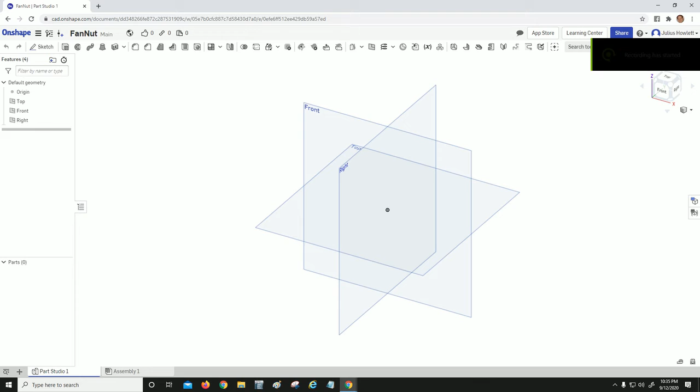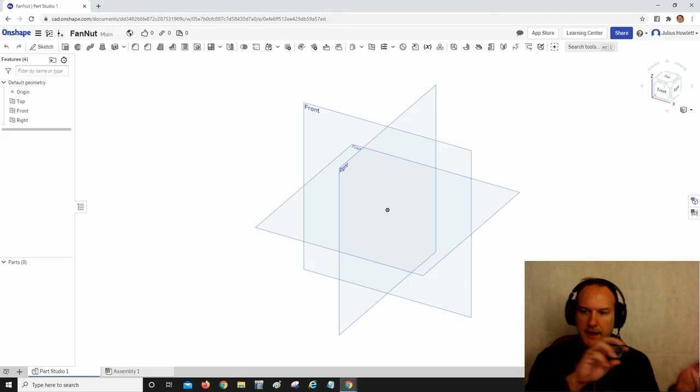Let's go ahead and get started. I'm here on Onshape, a free CAD programming tool you can sign up for. I've already taken all the dimensions of this fun little piece, so let's get started.

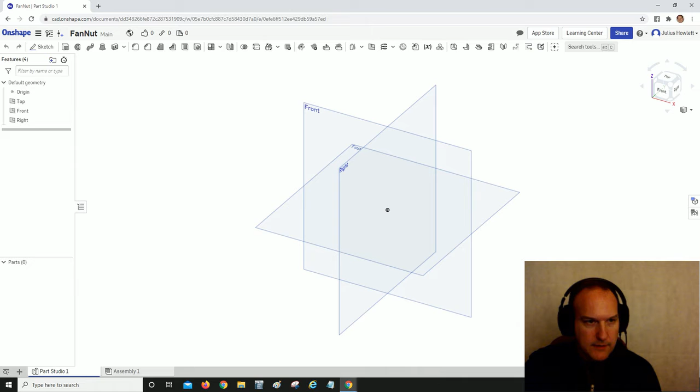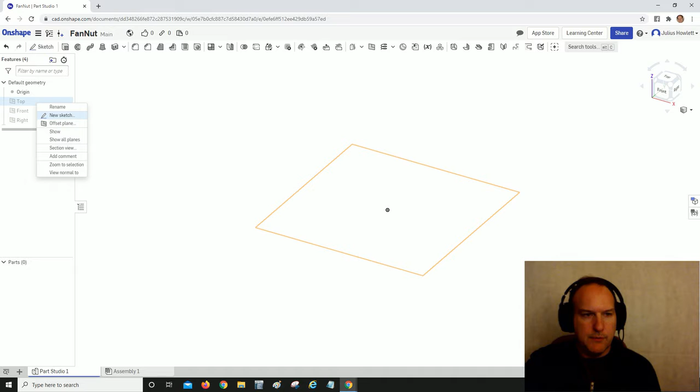Whenever I start off, this is a new fresh document. I turn off all the planes showing up by default, and usually design things such that as it prints, I try to start with the print surface, the surface that would go on the build plate first. And I always try to design things so you don't have to print them with support.

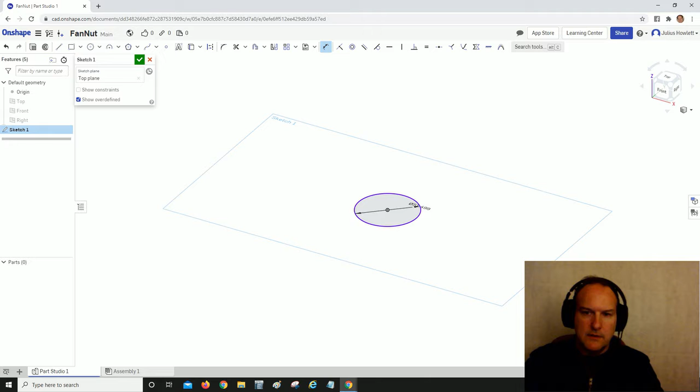So let's look at the first dimension of this. It's the top end here, that's the outside diameter. I'll create a circle starting at the origin, bring it out. We'll constrain it to that dimension by hitting D for dimension, click in here, and the OD is 38.8 millimeters. You can set your dimensions from inches to millimeters. I always work in millimeters, it's so much easier.

Then the height of this thing is about 9 millimeters. I'm not going to spin it around, I just want to, there's just an ever so slight chamfer here.

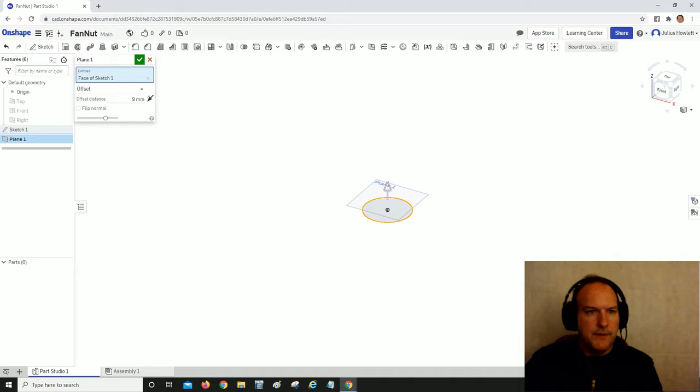So I'm going to create another plane from this one. I'll hit OK on that sketch, then offset this plane by 9 millimeters and do another sketch from there. So there it is, defaults to going north of the top plane.

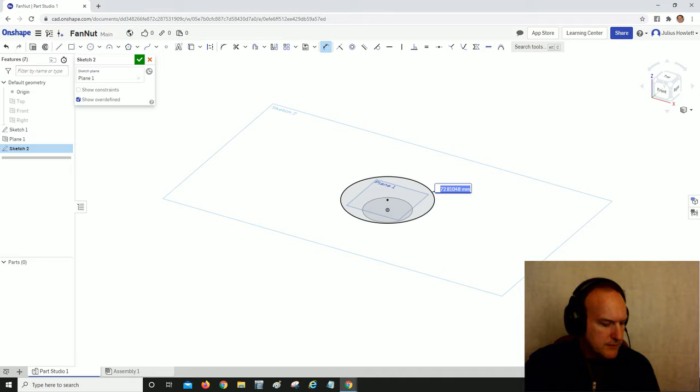On this plane I'll create a new sketch, and this time I'm still going to use the origin as my center point and make it a little exaggeratedly large. I'll hit D for dimension, and this one is going to be... 39.2, 39.2.

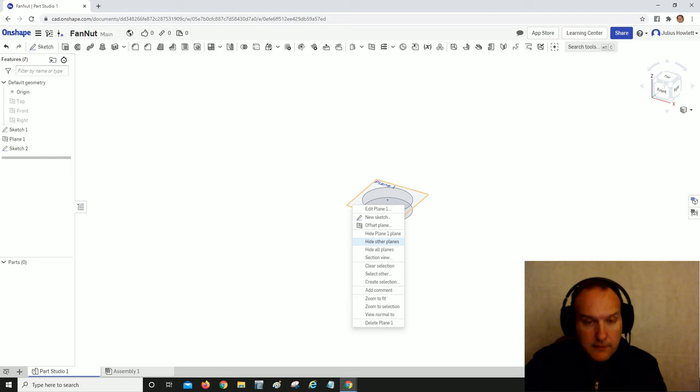Alright, now that we've got those two good to go, I'm also going to put in these little grips on the side here. There's 8 of them, and we're going to install each and every one of them and do what's called a loft.

So I'm going to hide all these planes because they always look so ugly. And then let's just go ahead and do a loft right now and get a solid piece started. We'll hollow out the bottom later on.

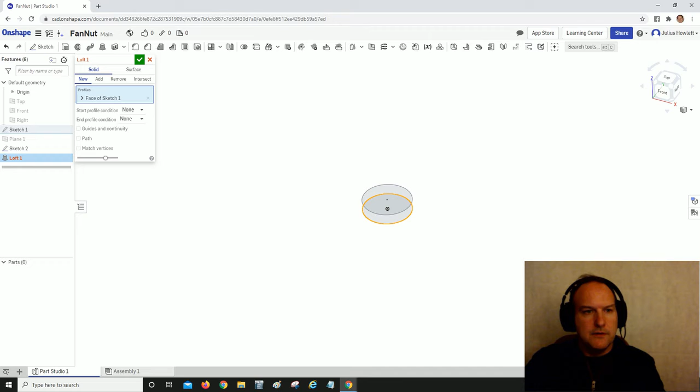So we'll go up here to loft, and I will create a new part starting. There's no start profile conditions nor that one. I'm just going to select these two pieces, and voila, it makes a cute little loft, a solid piece with varying dimensions.

Now what I'm going to do is go ahead and work on those outside pieces. We'll start with this one, and I'll just loft it down. We'll start from the base of it, which is actually going to be printed last. Let's see, the outside OD of those was 42.5.

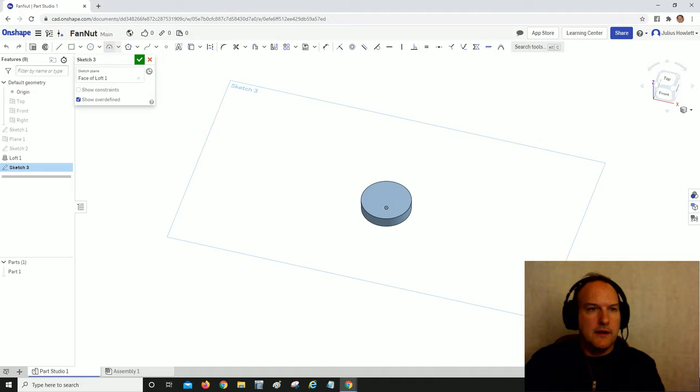So we've got this guy going. We'll do a semicircle, go ahead and orient it so we can see it normal to the plane. We'll do an arc, and go from here to here, making it a perfect semicircle by using a construction line from here to here. We're going to make this the center point buddies with that construction line.

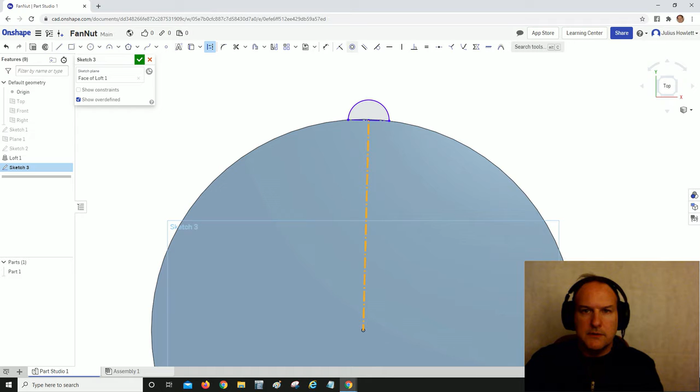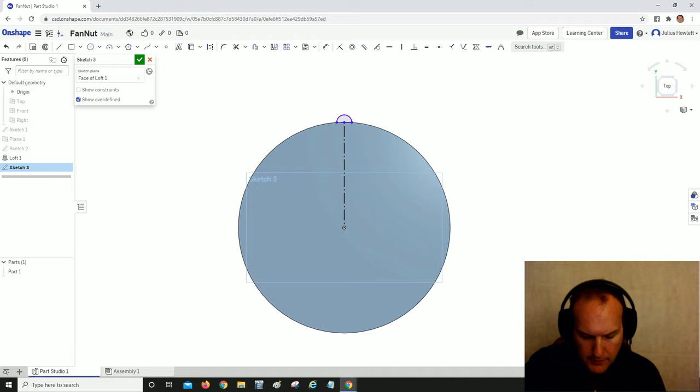I also want to create another construction line which we're going to make vertically perpendicular to the origin. To do that, you go up to your constraints and tell it you want it to be vertical—you could also hit the V button. This is going to be a semicircle, and if we do our math right, from here to here should be 39.2.

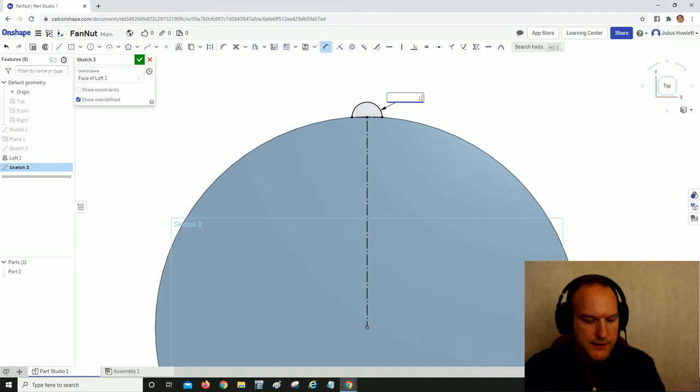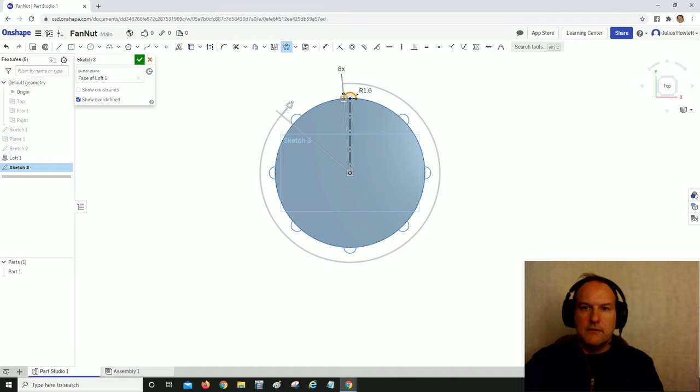So what we're going to do is a circular pattern using that, and it's going to go all the way around. It's not going to be 3x, the default is 3, we're going to change that to 8. And voila, now you've got 8 of them, and you didn't even have to lift a finger.

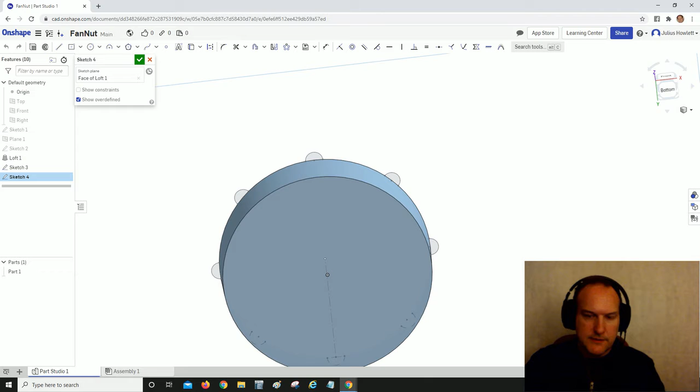So now we've got our little detents on the top. Let's go ahead and do our little detents at the bottom. We'll create a new sketch down here as well. We could use these as references, but instead we're going to just do the exact same design on the bottom. This time I'll make a construction line from the origin to the very bottom, and it looks like it's snapped to a vertical position.

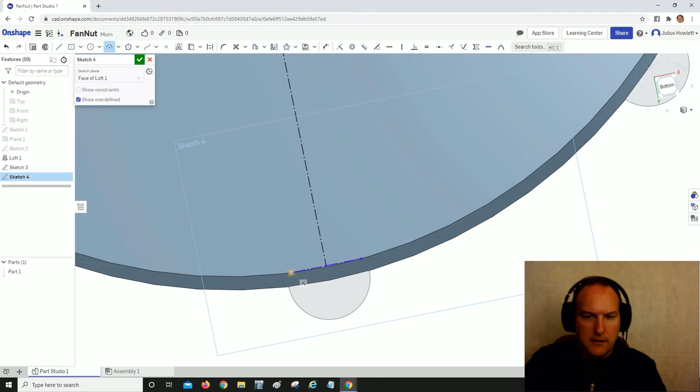Then I'm going to create my favorite little construction line that goes from here to there, and of course it's going to be a midpoint buddy with this thing, so I've got to remove the connection from there to there, have it connect instead to here at the midpoint. And I'm going to create another arc in much the same way as I did the last one, and this time the arc should be 1.4, the new one, so it's going to be 0.2 less than the previous one.

The other one's 1.6, now it's going to be 1.4. So we'll go ahead and set up that dimension to be 1.4. Is that right? Let's see. 1.4. That sounds right, close enough. If it isn't, we'll live.

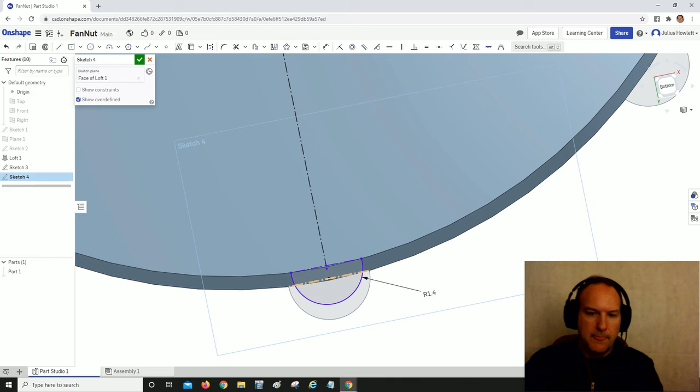Again, it's going to be midpoint buddies with this thing. I'm going to make it coincident by typing the I button. Notice how everything turns black once I constrain it. I hate it when things turn blue, that means something can change and get all wonky on me. But by making it black, it means nothing's going to change on me if I add other things to it. You'll probably see why as it develops along.

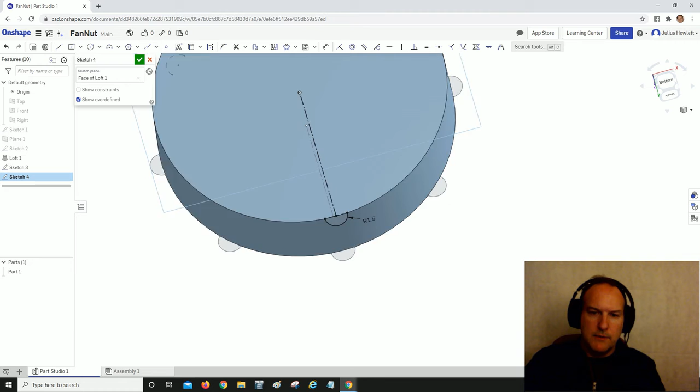I'm going to change it to 1.5 just because it looks a little closer to what I want. Alright, once again we note what's coming up here: we're going to put in a circular pattern. We want 8 of them. Go ahead and pick this guy, change that default of 3 to 8, and it looks like everything's beautiful. I'm going to hit OK.

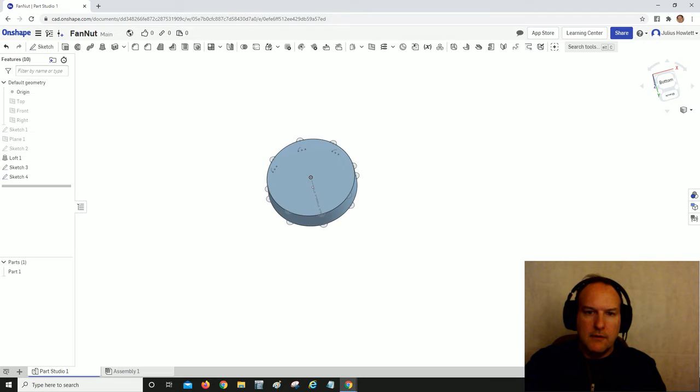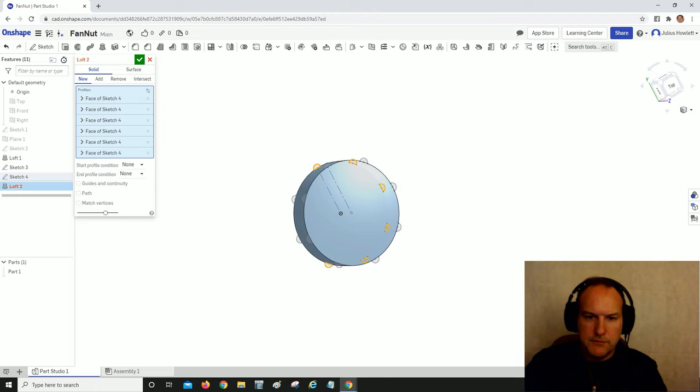And once again we can loft everything from top to bottom, so let's go ahead and do that real quick. Loft: we'll choose this guy, this guy, this guy, this guy, this guy, using my roller to basically zoom in and out. There we are. And then I want all those guys to connect with this guy, this guy, this guy, this guy, this guy, this guy, that guy, and that guy.

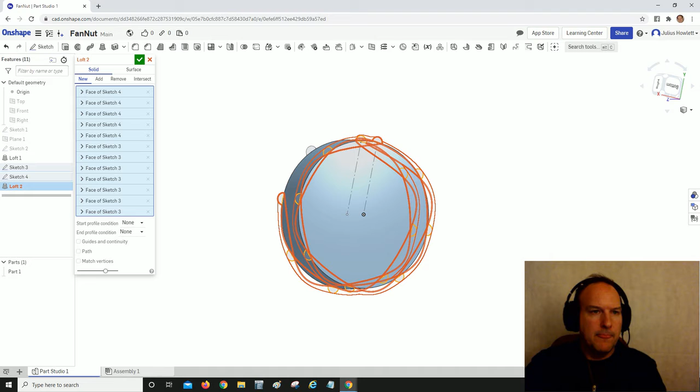What a mess, huh? So what I want to do is add, and we're going to go ahead and get rid of all those again. Obviously, I messed something up.

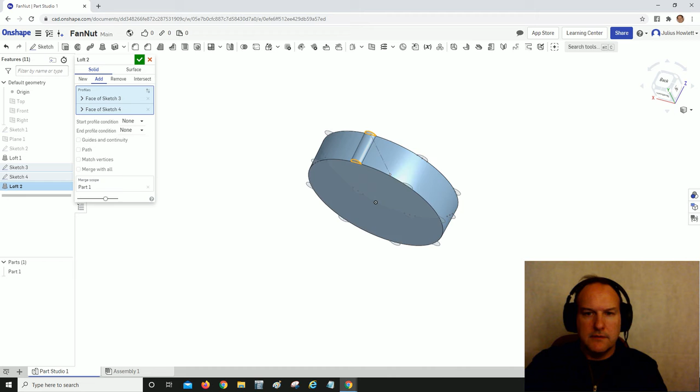Let's just do it one at a time, shall we? We'll do it that way, that way, and it looks like it was perfectly happy doing that. It'd be really nice if I could do that again like this and this, but unfortunately it's just going to assume that I keep trying to S-curve it along.

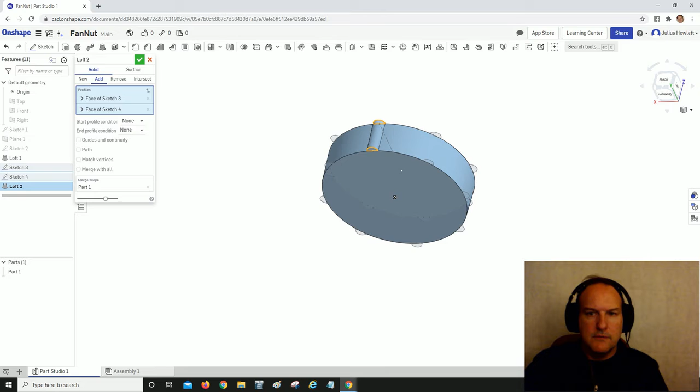So let's go ahead and get rid of those guys, and we'll just do it one by one. We'll hit OK, and we'll do another loft. I do this for all 8. Notice how the sketches all disappeared after I hit OK on that, so I'm going to have to make them both appear again. Once I ask them specifically to appear again, they basically won't be forgotten again.

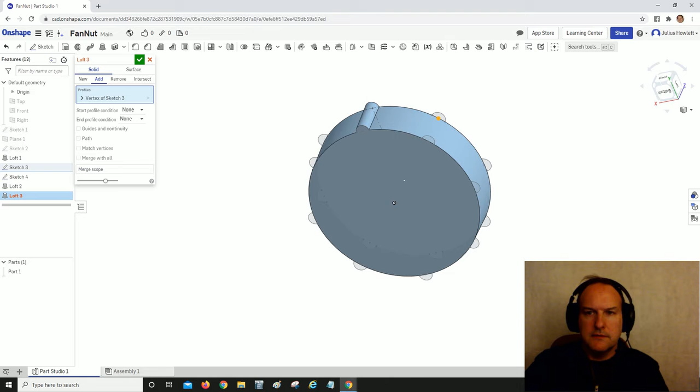Oops, nope, don't want that little fella, we want the actual surface. And there we go, it's beautiful. We'll do it for all 8. I may have to skip ahead so people won't have to watch me do this again and again painstakingly for each and every single one of these.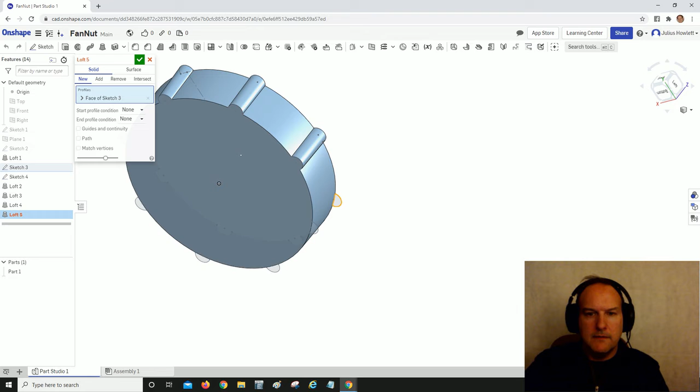Or, you know, I might just keep it in there. Why not? That looks good. We'll just make another one. You and you, looking beautiful. And it looks like it actually knows that we need to add it instead of creating a new part. That one, that one. And we'll do another loft.

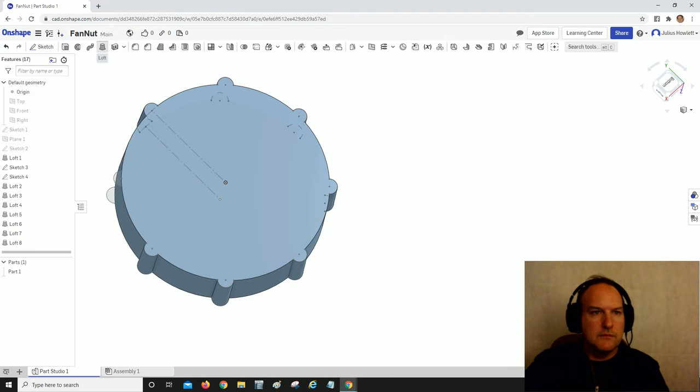Beautiful. Look how this is just coming together. That one, that one, and of course we will also do this one and this one. And that looks like it's getting close to my little part.

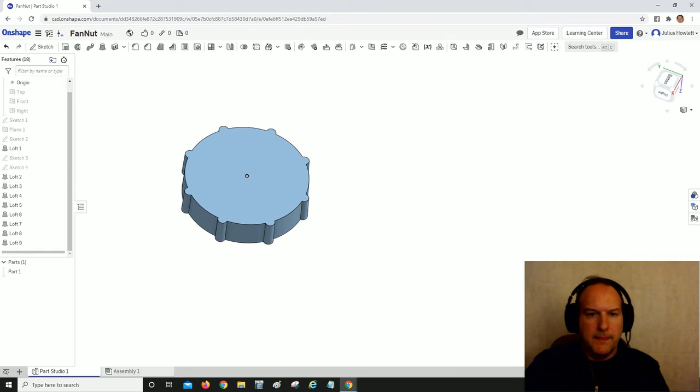Next, we want to make some of these sketches disappear because we no longer need to refer to them. So I'll just go ahead and hit it over here in the features history, and we'll go ahead and look at it from the top again. There's the top. And now I want to hollow this thing out.

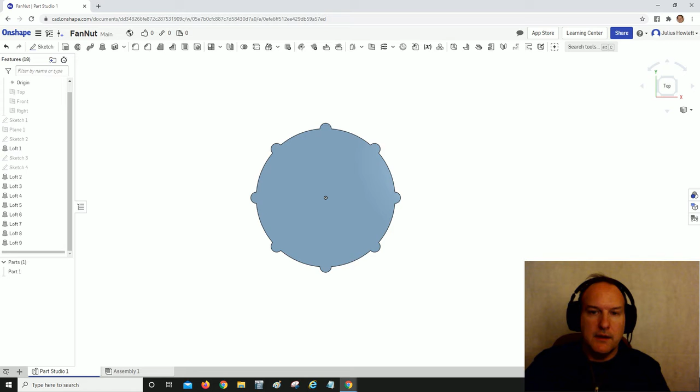The inside diameter was, according to my notes here, 24.4. Take that back, it's 28.2 on the most open-ended side. So we'll go ahead and create a new sketch here.

We'll make a circle by hitting the C button. And this time it is going to be... what did I say? 28.2.

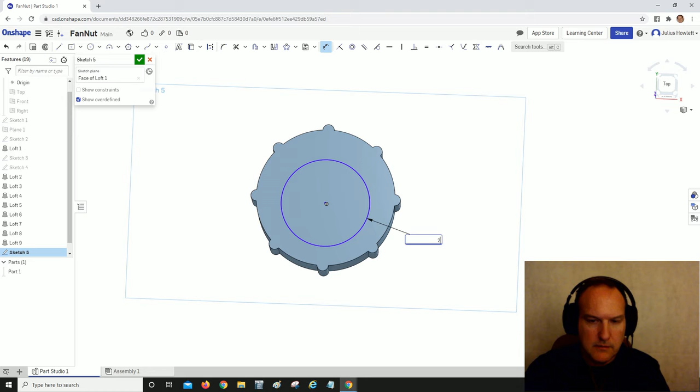Sometimes people put these constraints inside the history, but this is one of those one-off fun projects that's just going to be done once, so I don't really need to be too nitty-gritty. I'm going to make the origin coincident with the center of the circle.

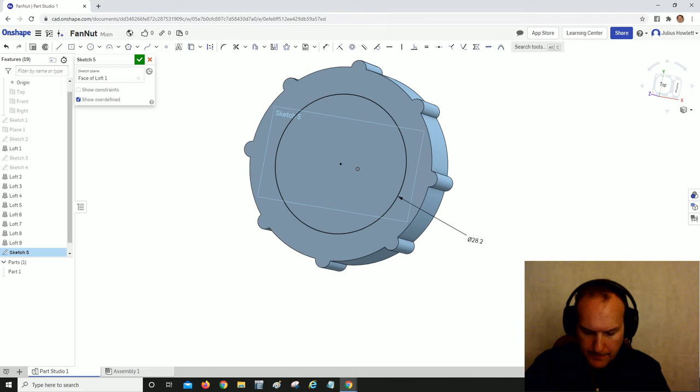Now that we've done all that, that is the widest inside diameter. I know that there's also a little lip on the inside of this that it goes down to. That lip is about 1 millimeter in height. So in other words, I just need to recess this down about 8 millimeters instead of 9, so we actually get that little lip on the inside.

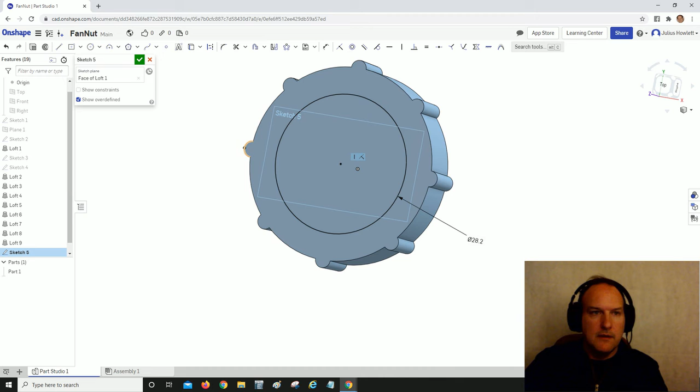So let's do that: 28.2. The other one's going to be 24.4, the other ID that gives us that lip. So how do we do that? Instead of doing add, we're going to extrude and remove, and we're going to only remove a blind depth of 8.

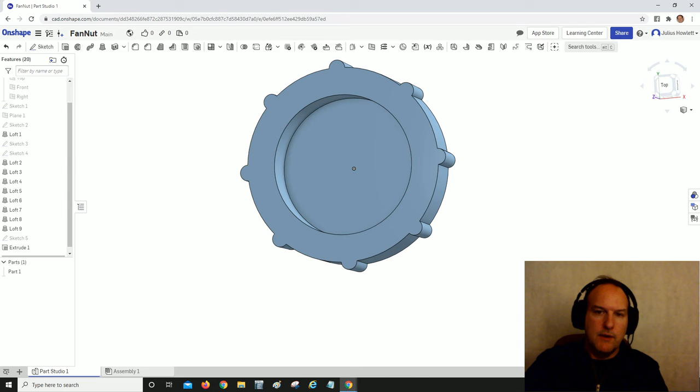There it is, getting closer and closer. Now we're going to go ahead and use the new surface that we just acquired, and we're going to create a new sketch. Draw another circle, exactly like we did the last one, and this time that circle is going to be, according to my notes, 24.4.

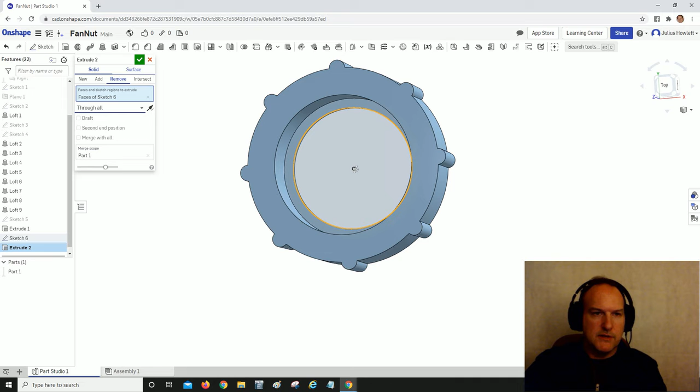Isn't that lovely? We're going to go ahead and extrude this one all the way through. Remove, and you're going to remove not blindly, but just do a through-all. It's just cleaner that way - don't just give blind measurements when you know it just needs to go through everything. And there we have a 1 millimeter lip on the inside of this happy fella.

Now this is the challenging part that people start running for the hills on - it's the little thread on the inside of this guy. And today we're going to learn about the helix.

This little feature up here is the helix, and the way you do it, copying threads, is actually fairly simple. All you have to do is figure out how many rotations there are on the thread, and that's pretty much all you have to do - we already know the rest of the dimensions.

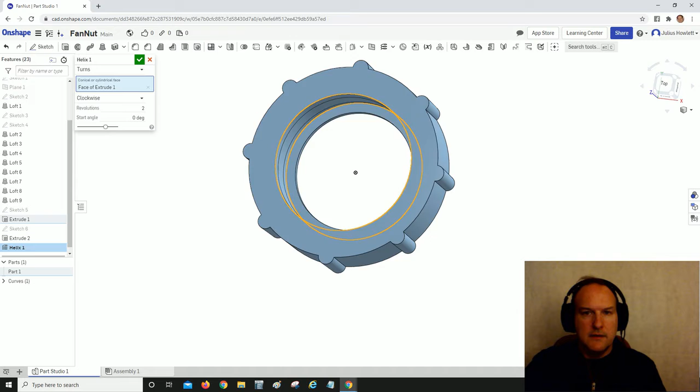All we need to do is, in this case, put in - it looks like 2 revolutions. 2 revolutions, and I believe it's clockwise, on the inside of here. Voila, you can see there are 2 revolutions going through that thing.

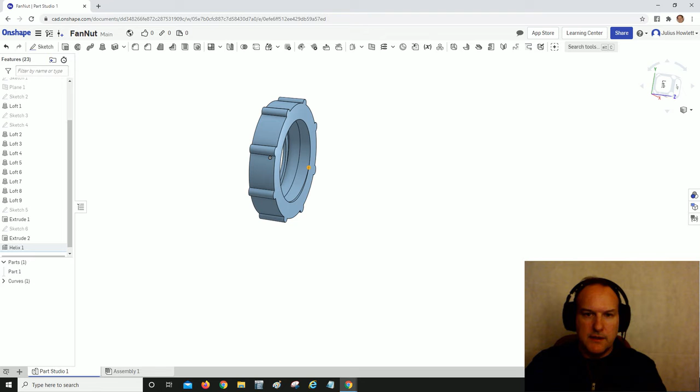Alright, now that we have a helix, we're only going to be using that as a guide path for the profile of the actual thread itself. So now I need to find out where this helix intersects with the outermost circle, and I'm going to use one of these planes here to create a new sketch.

Alright, and I believe that guy pretty much started at that intersection. So I'll use this, and we're going to use the inside of the circle as a guide reference, right there. Alright, and I'm going to make it construction.

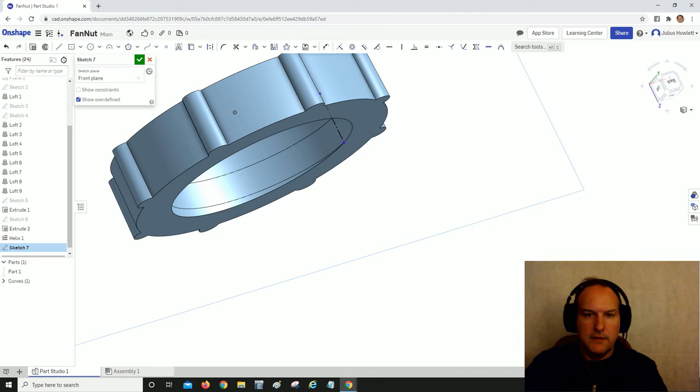And we are going to make a little triangle for our thread, the profile of our thread. That's going to be a real line. I'm going to hit L, and you're just going to make an equilateral triangle against the construction line.

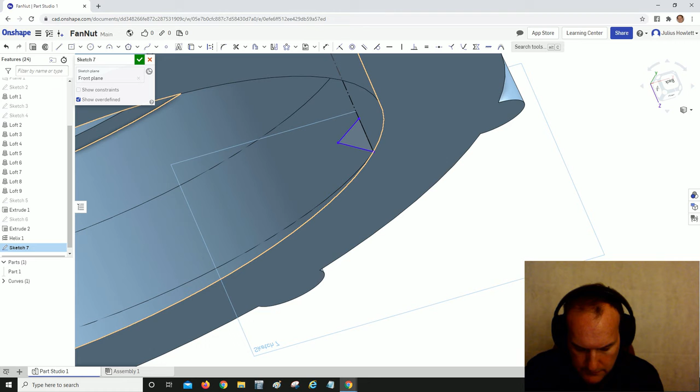Alright, and the triangle height looks like it's about 2 millimeters. Yep, 2 millimeters. So the distance from here to here, we'll make another construction line, and we'll make it midpoint buddies with that edge of the triangle.

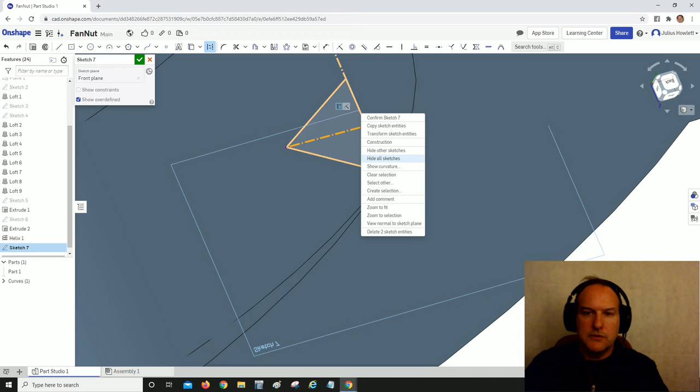That's going to be one equilateral to the other edges. I'm going to make sure I select the correct one by doing select other, and highlight through, scroll through here until I find it. There it is right there.

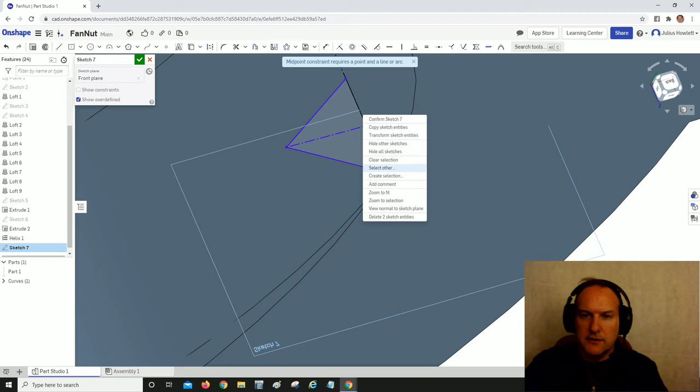And I want those two to be midpoints. You know what, you need to make sure you choose an actual point in the line itself - not 2 lines, can't be midpointish. So I'm going to hit select other just like I did earlier, scroll through until I find it. There it is, and voila.

They are now midpoint buddies. Isn't that great? Okay, so now I also want to make them perpendicular to one another, and I want this height to be 2 millimeters.

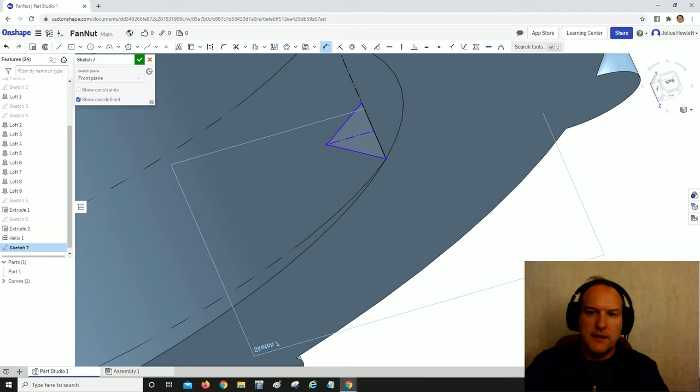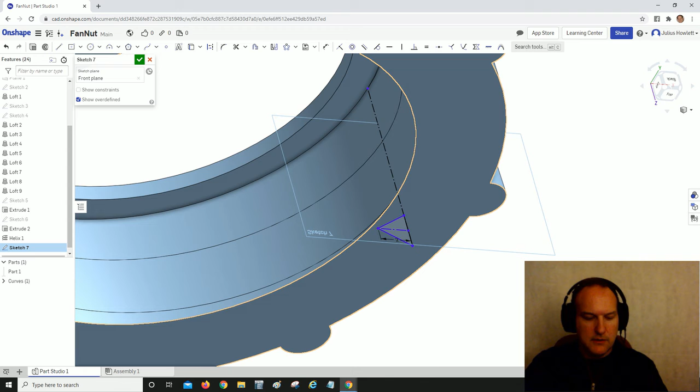Fair enough. And then I want this side and this side to be equal. And again, the bottom one down here doesn't know that it needs to be equal to the rest either, so I'm going to select it again. There it is. And I highlight this one, make it equal as well. And it did not like that. We'll go ahead and Control Z to get back to where we were. And let's find out what constraint is messing up here. Alright, so I can tell that this end right here is loosey-goosey, and I don't like that. I need to basically anchor it to this point where the helix starts. So I'm going to choose this point thing up here, highlight the point that the helix starts.

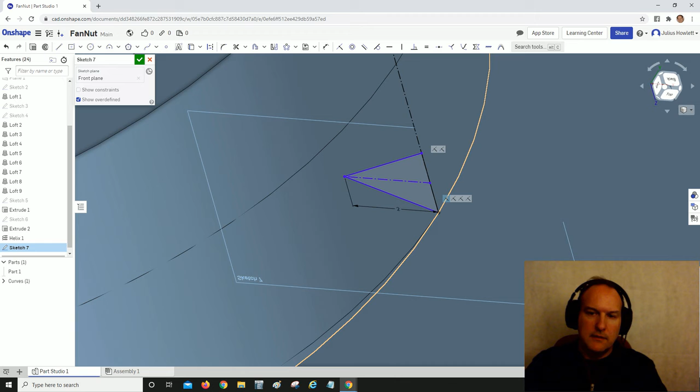And I'm going to make this coincident with the edge of our triangle. And now we're going to go ahead and make this equal to that, which it already is, but I also need to set up a parameter where I lock in the edge down here. So I'm going to go ahead and select other, find our favorite edge, and give it a dimension, that guy right there, and we'll just make it, I was hoping to make it 2, but maybe we should just make it 1.6. There we go, a nice clean 1.6.

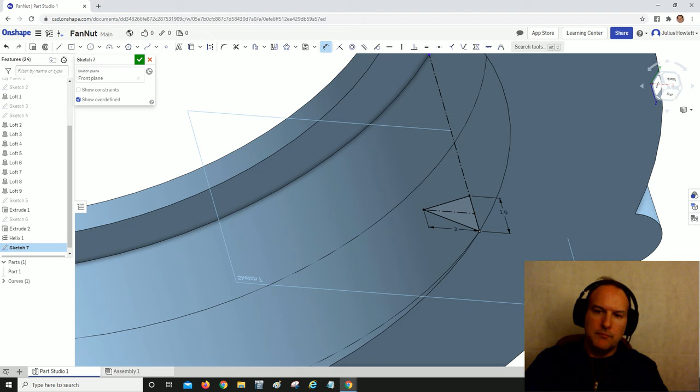Now we've got the profile of our thread, and notice that this one up here is getting a little bit green, or sorry, blue. We're just going to leave it for now. Okay, now let's go ahead and sweep that profile all along our helix so that we can actually make this thing correct. So I'm going to hit OK on that.

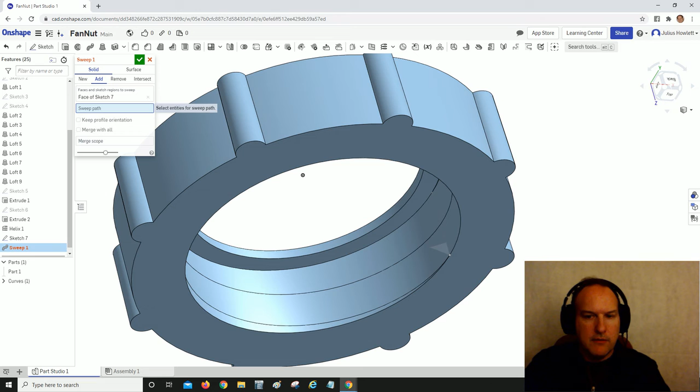And this sweep up here is what we want to do. We're going to add it to the rest of the body. We're going to choose the face, which is our triangle. We're going to choose the sweep path, which is our helix. And voila, isn't that just magical? Look at that beautiful, beautiful thing.

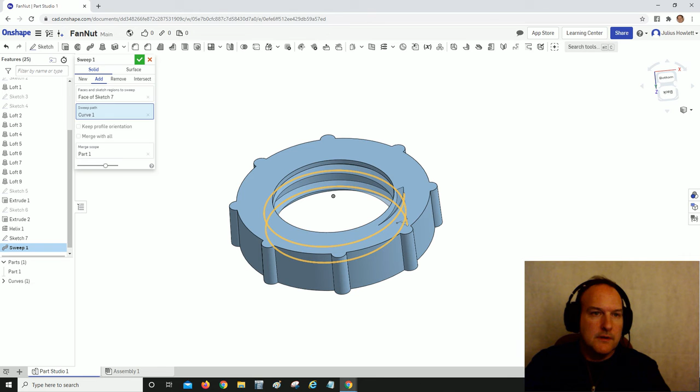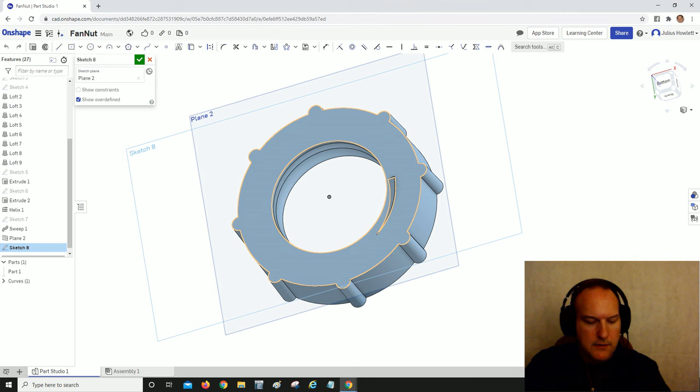So the only problem here is that now we have a little lip that's coming out of the profile of the part that we don't want. So what we can do to get rid of that is fairly straightforward. We can do a little cheat where we create a plane outside, just offset a plane from here. So I'll just offset plane. I'll give it like, this is really sloppy by the way, 3 millimeters, and then I'm going to use this. Well, we've got to create a sketch on that new plane that we just created. Then I'm going to actually really use this. It's not going to be a construction line, I'm just going to use this entire face, right?

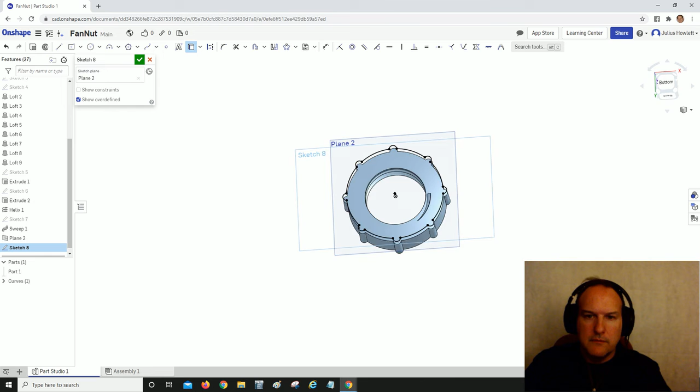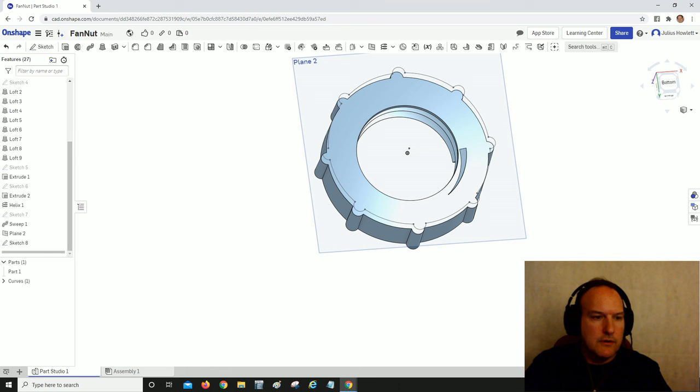And we're going to delete or remove everything below this outline. So now it should be grayed if it's actually a solid piece, but for some reason I'm not seeing it grayed out, which is really odd. Huh, should be grayed. Let's see if it will actually remove. And what I'm going to do is I'm going to do a remove. So I'm going to extrude, and we're going to remove, and yeah, you see what I mean? It's not really showing up there for whatever reason. So let's scratch that real quick. Let's delete that sketch. Didn't really need to look like that anyway.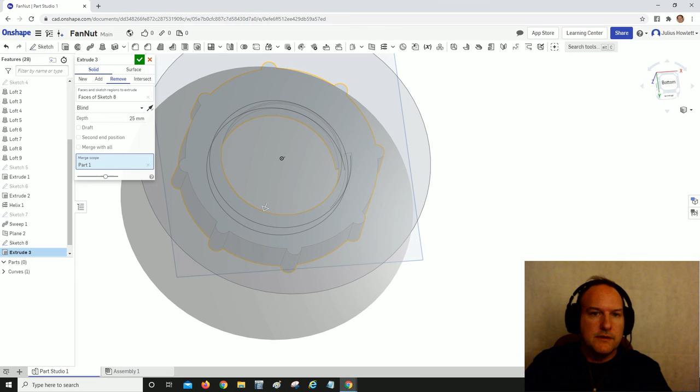We're just going to delete the sketch, and this time instead of just trying to rely on something else, we're just going to draw a big old circle starting at the origin. There, doesn't matter how big it is, that looks big enough. And now we're going to extrude and remove this time. We don't want to blow away our entire part, we just want to go up to a surface. So we're going to go up to face, and we're going to choose that face right there. We're just sneaking up to it. And now you can see that it actually deletes this little piece. It actually gives us a bit of a preview. Now it's nice and clean.

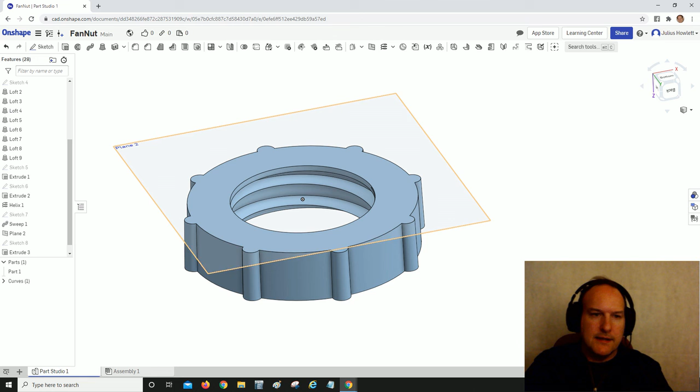Let's go ahead and hide all these planes. They always kind of mar the view. Alright, and that, my friends, is the piece that we want. This should pretty much be the final thing. Let's print it out, see how it goes.

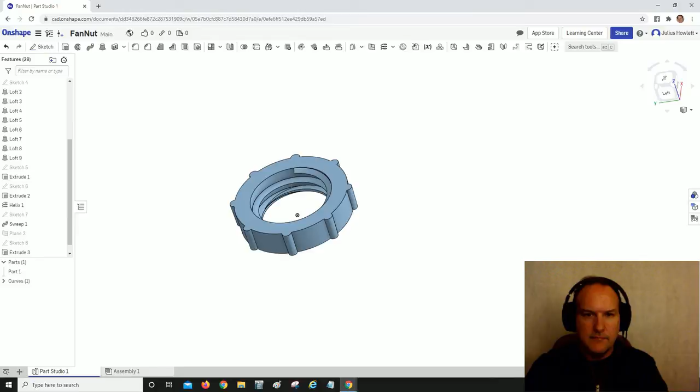So here's the fan. Here's the original piece that goes on there for one side. And just go straight around here and put it on.

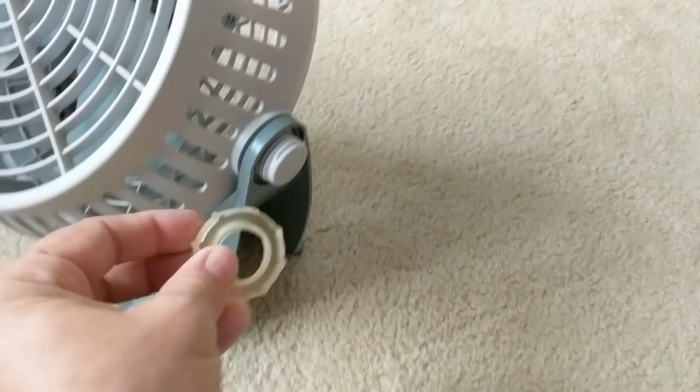Go. Doing this one-handed.